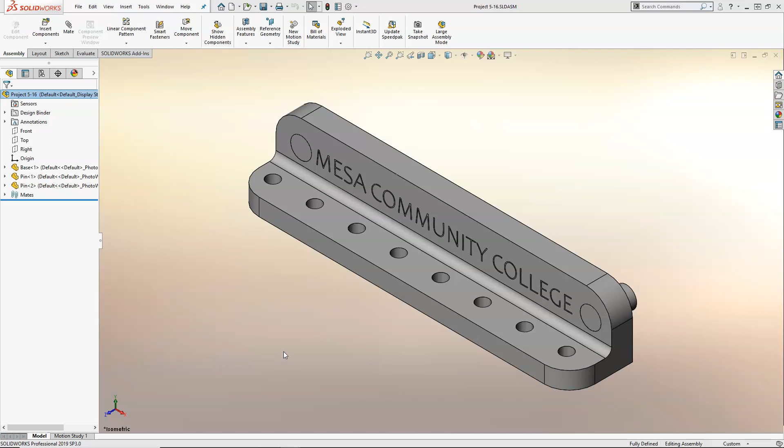Just notice the opening of the videos all look pretty much the same here. So I'm going to hit the space bar.

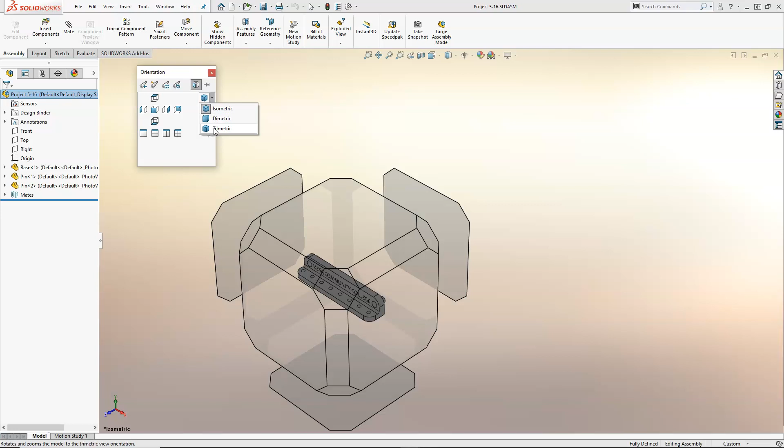Under our orientation we have the standard views again. We don't really have a need to split the screens. We have a normal to, but then in the upper right corner I can go to dimetric or trimetric, which just kind of shifts the position.

I can also hold down the middle mouse button, rotate this a little closer to position, and I need to know the order that we're going to assemble. So we have the crank on the left side, the coupler in the middle, and the follower on that side.

So we need to bring a component in. It's not currently loaded, so we're going to browse to our folder, and we're going to bring the crank in first.

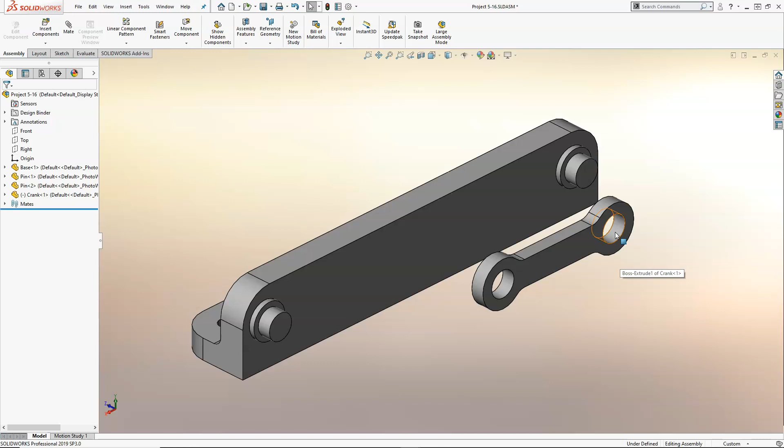And I can just rough position it. It doesn't really matter which side, it's symmetric. As far as orientation, it's pretty close there. So with our 6 degrees of freedom, I do want this to rotate. But there may be a location, something that I would want to set up as a mate, just so it doesn't move unexpectedly. Alright, so I've already selected my cylinder.

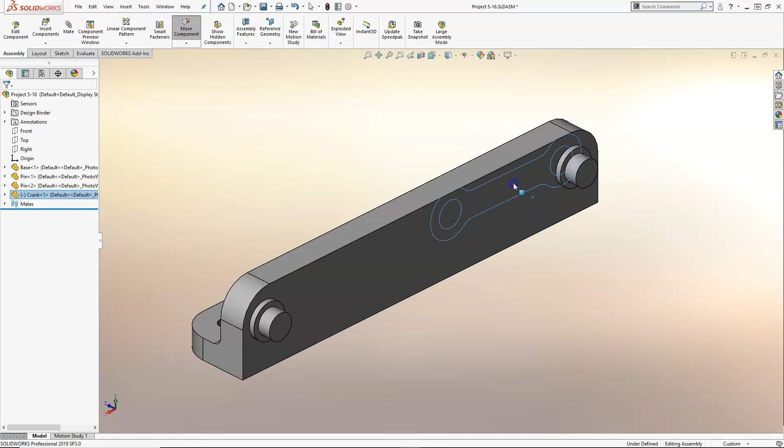I'm holding down the control button and selecting another cylinder, and we'll go right into concentric. This is going to be the fastest way to apply the mates. So that goes into position, but it's still able to move back and forth.

So I'm just left clicking, holding down on the face, and as I move the mouse it's going to move the part. So I've clicked the inside face, holding down the control button again, and we'll make that coincident.

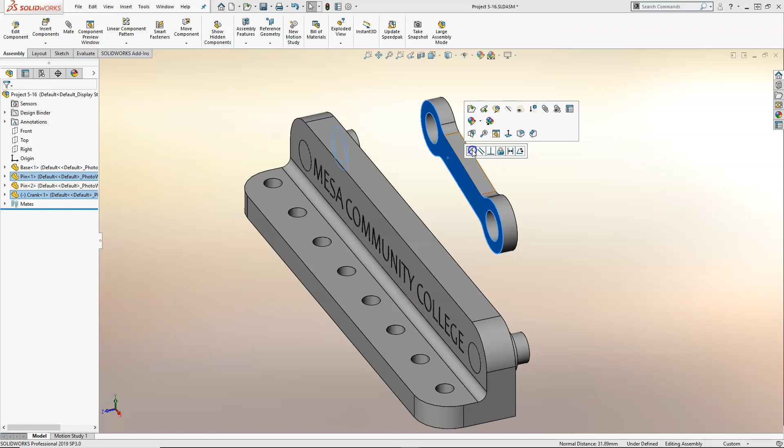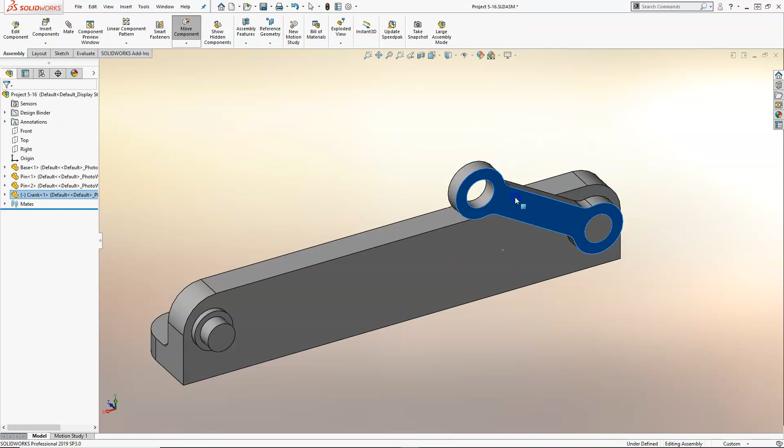So we're doing a lot of coincident, a lot of concentric. Anytime you have planar faces, you're going to be doing coincident. Anytime you have those cylinders, they're going to be concentric. In this case I do want this to be able to rotate. I don't really know what's down here, what the rest of the assembly looks like, if this is going to run into something or if there's issues, but that gives us a good start.

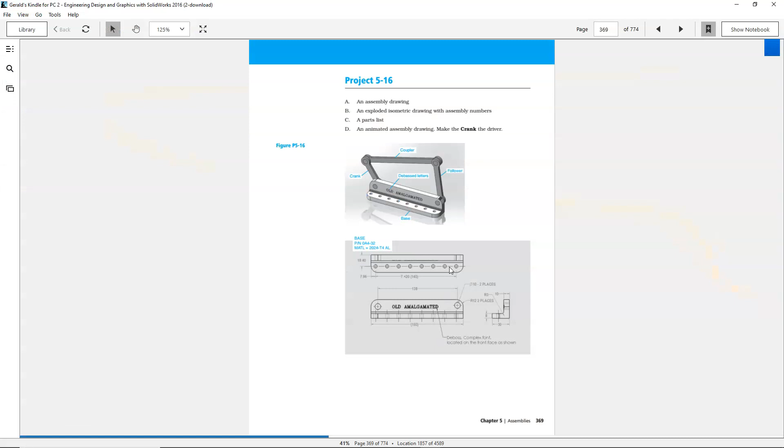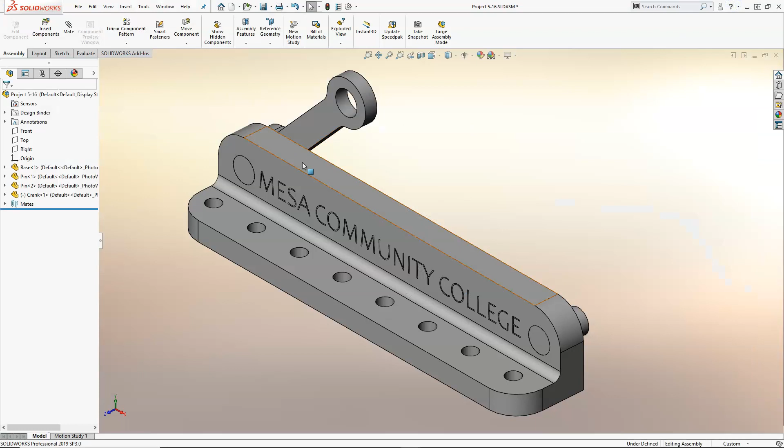So the next item would be the pin, if I'm going in order here, thinking about how this would assemble. It doesn't necessarily have to be the pin, but because of that flange, I'm going to need that as a space or a location. If I were to just take the coupler and put it right up against the crank, then I wouldn't be leaving room for the pin. And of course, if it's on this side, it's going to run into the base.

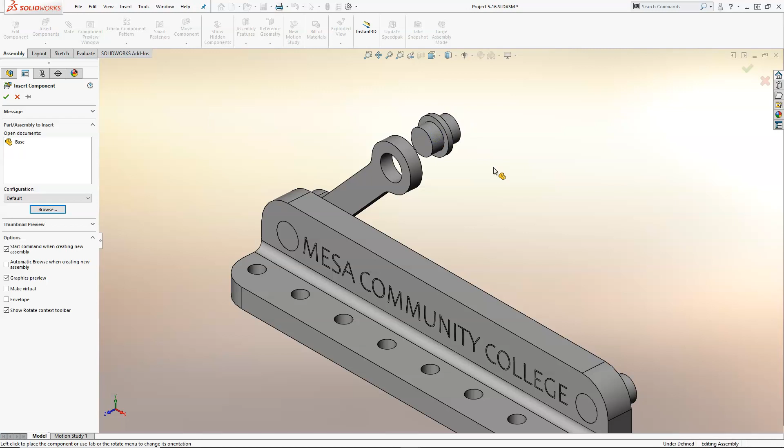So let's go ahead and insert a component, and then browse. We'll pull the pin in, and its orientation, not so much. So if I look down at the reference triad, let's rotate about X because it's symmetrical. Doesn't really matter, and we can go ahead and place it. I'm just going rough position as we rotate. I got it pretty close. Didn't throw it off into space anywhere or do anything strange, so we'll call that good.

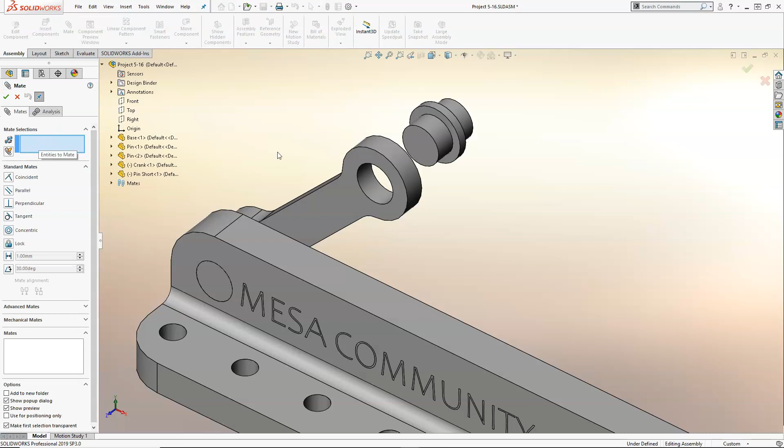So previously we did the select and control select. Let's do the paper clip this time. So we go up to the mate relations, and as long as the blue box is there, I don't have to hold anything down on the keyboard. So I'm going to pick my cylinders, and that's going to allow it to go to concentric. Again, the pop-up is going to be in there.

Rotation, well, it's still going to rotate with the part. We haven't really done a motion analysis or decided what we want to be the bearing surfaces and the press surface, those types of things. So we're going to hold off on that and let it do its thing, observe the motion, and see what we can come up with.

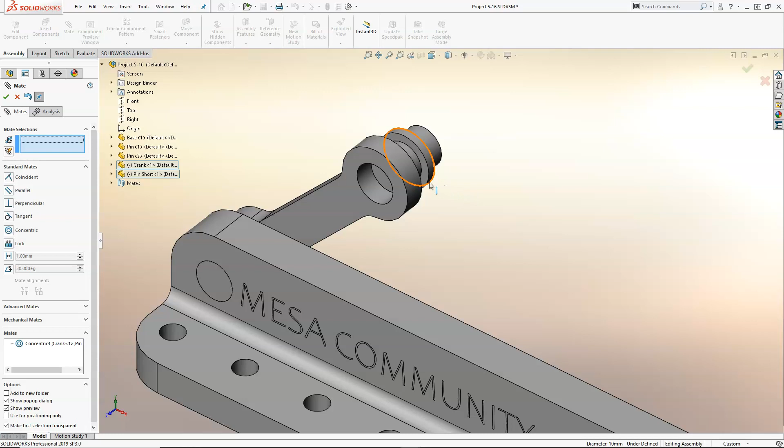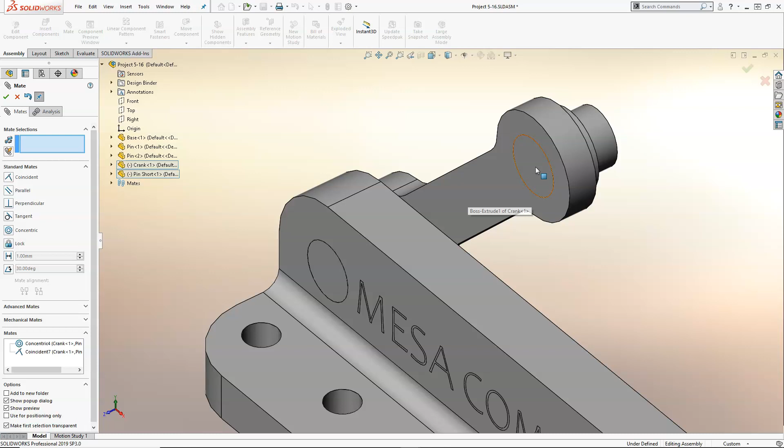Alright, so once I picked a strategy, I'm going to kind of stay with it. And that inside face, rotate around, go to the other inside face, and hit OK. Now, because these are planar and the same dimension, I could have picked that face, but if that dimension changes, if the crank gets a little thicker or thinner, then the flange isn't really going to follow it.

And I may end up with an error since that is the seating surface. When we press that in or put it into the crank, that's the point of contact.

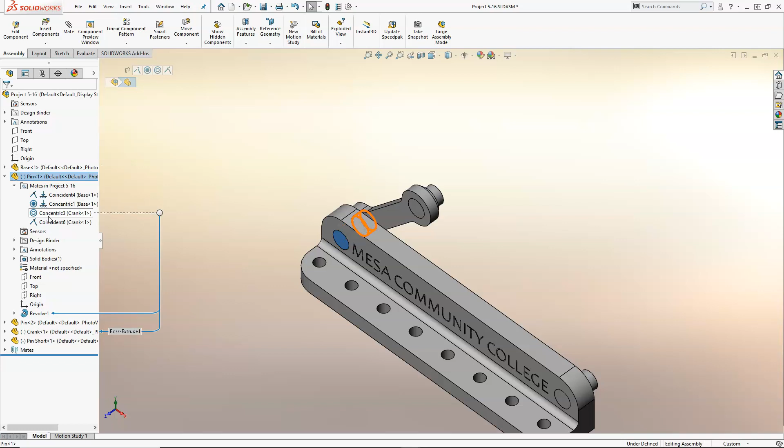Alright, so we're going to let that rotate. So now I thought I located that one. So let's see what's... oh, we have the other concentric. Not exactly sure why it would cause that one to go underdefined, but I'm okay with that. We'll see what happens to the other one.

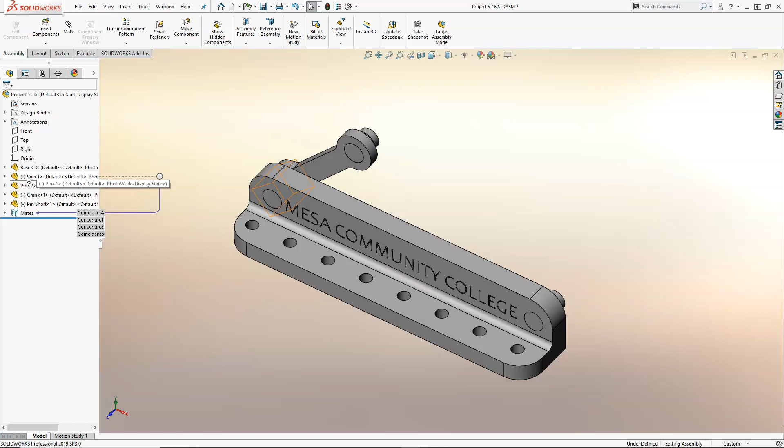Alright, so I'm always doing kind of this running tally as we go through the process, looking over to the left. That one was defined, now it's not. Not sure why. Does it hurt anything? In this case, no. So we'll just go on to the next one.

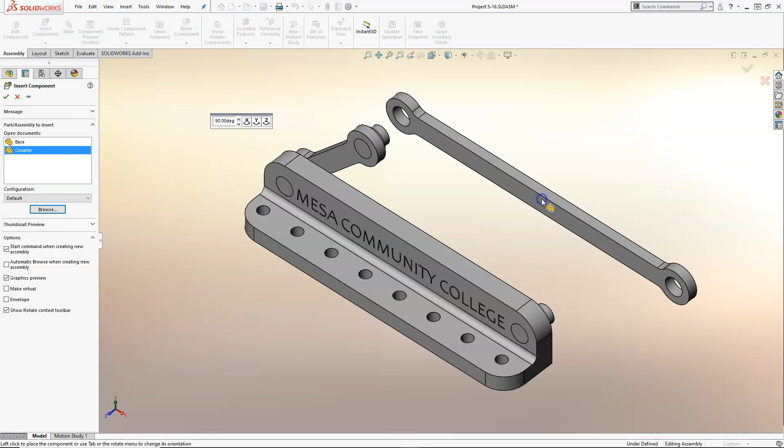Insert component, browse, and now we're looking for the coupler, which is the long one. And we bring it in rough position. Orientation is okay. And now to locate it, we're going to go through the same process. Cylinders. Let's see, we need another way.

So if you're comfortable with the select and control select, stay with it. If you're comfortable with picking the mate relations paperclip, stay with it. And then I'm going to introduce the S key. So S on the keyboard, and that will take me to the paperclip.

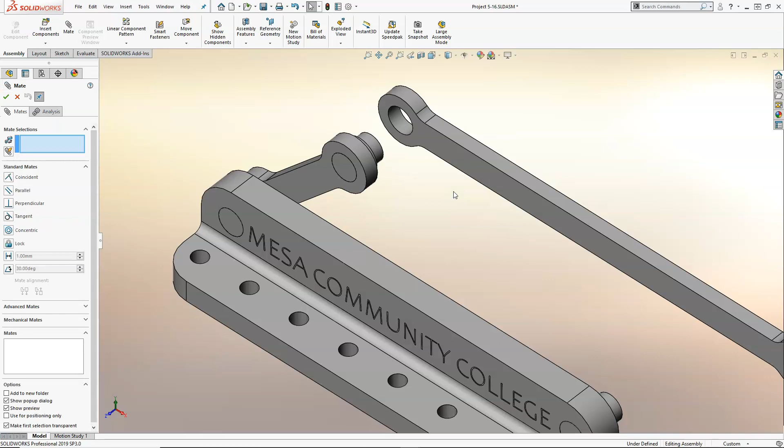And since I'm in the blue box, I don't really need to go over and do anything, I'm just ready to pick. So again, the advantages of the mate properties is that I don't have to hold down the control button on the keyboard.

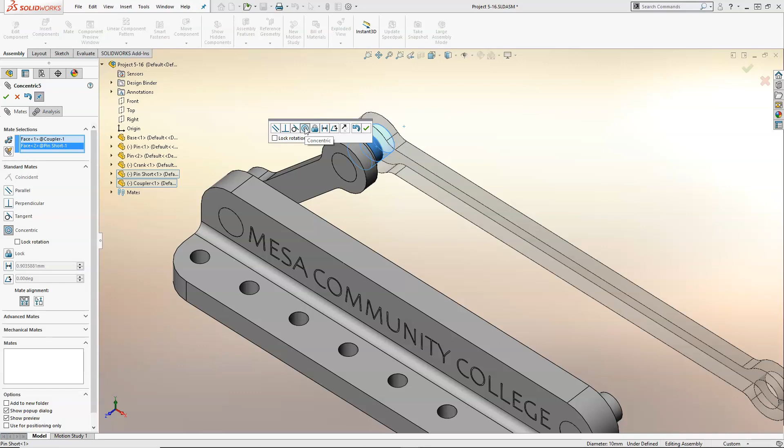All right, so the pop-up, we're at concentric. If I don't recognize the type of mate that it is, hover over top of the button, or look over to the left and it will give you the text. Okay, so we go ahead and hit OK.

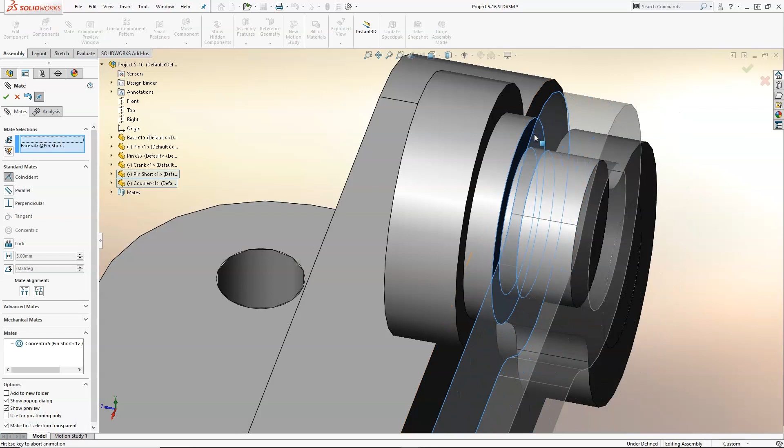Staying with my strategy for the coincident, pick the face, rotate over, and then the middle mouse wheel, wherever you're pointing with the arrow, that's what's going to zoom in. So if you have any difficulties picking a face too far out, do not hesitate to zoom in and make sure that you can locate that geometry.

Alright, so at this point, rotate a little bit more. If I go to move the crank, it's kind of staying in position, but if I wanted to, this can do all kinds of strange things.

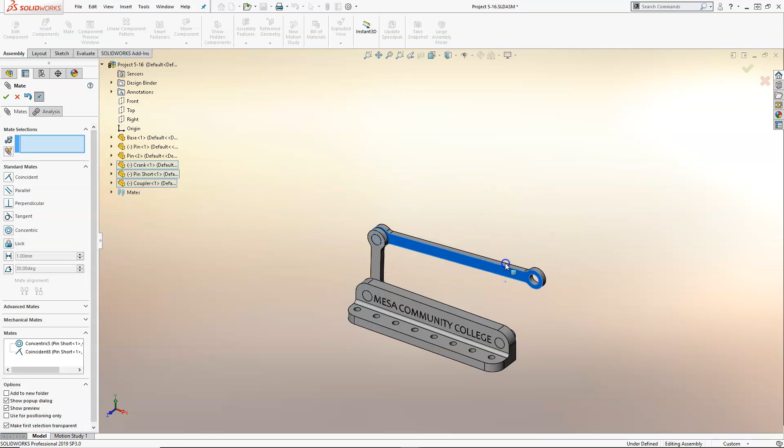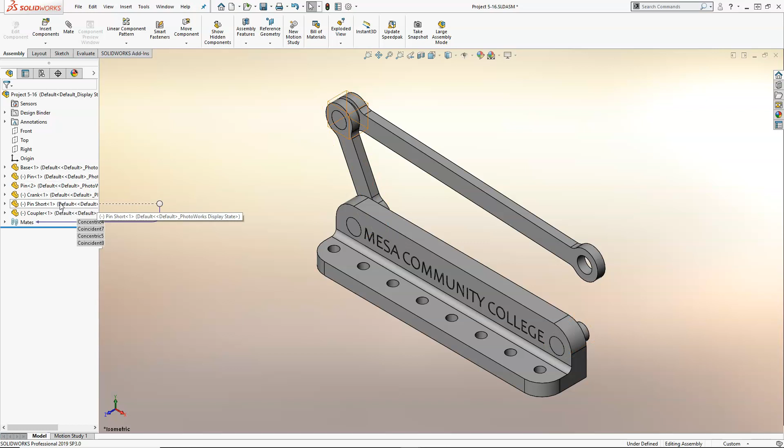Alright, so Control 7 gets me back into an isometric view, and then we're going to insert another instance of the short pin. So hold down the control button. Last time I think I did it from the work area, grabbing onto the part. Here I'm going to grab instance 1, drag it in, get it pretty close, let go of the left mouse button, let go of the control button.

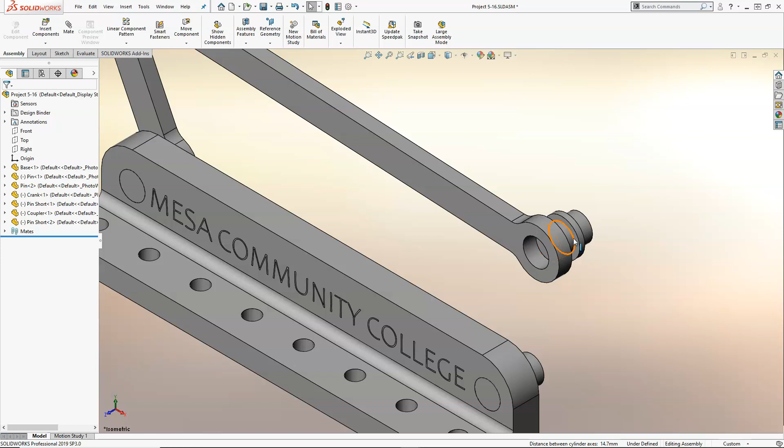Now I'm in position. Alright, so I'm going to go with select, control select, and concentric, and the mating seating face, control select, and coincident. So you're going to find that you're going to get into a rhythm with this, whichever method you prefer, and be able to generate those geometries.

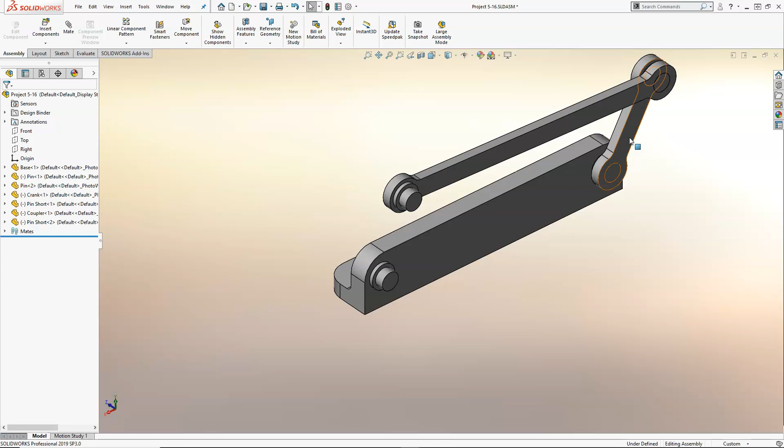Alright, so let's say for a second that I forgot that I have a follower arm, and I grab a crank arm and I bring it back in. Oh, don't know what I clicked there, but I got something. And I go ahead and we're going to apply those mates. Concentric. Yeah, that got kind of lost, so if I left click and hold down, it did apply.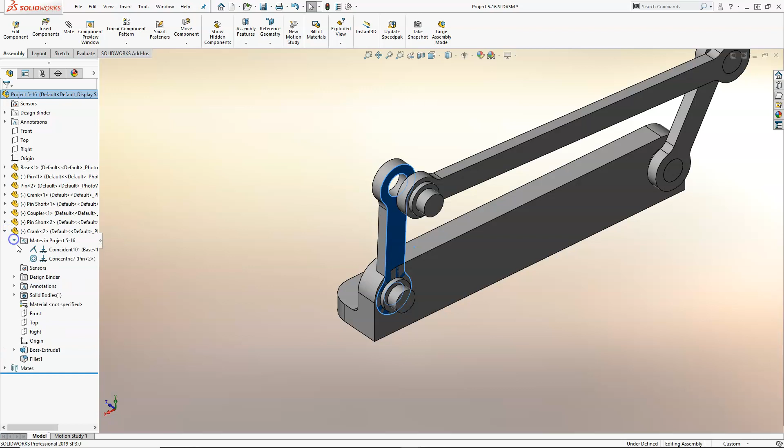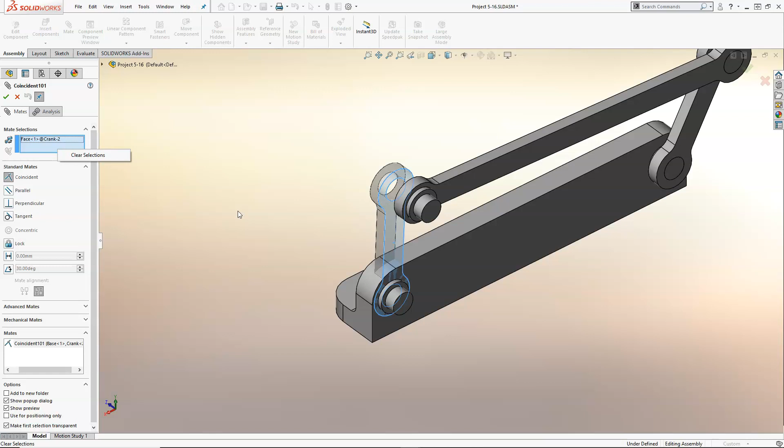Alright, so I got a coincident to the edge. Button happy, so occasionally we're going to get that inferred geometry. So I want to delete the edge. It's on the base that doesn't help me, so I can just highlight it and hit delete on the keyboard. If you right click and clear selections, be careful with anything that says delete all or clear selections. Going to pick on the face.

Cause mate errors. Do you want to avoid these? We'll let it go ahead and change. So it turned it around. I probably could have just picked the other side and it would have been fine.

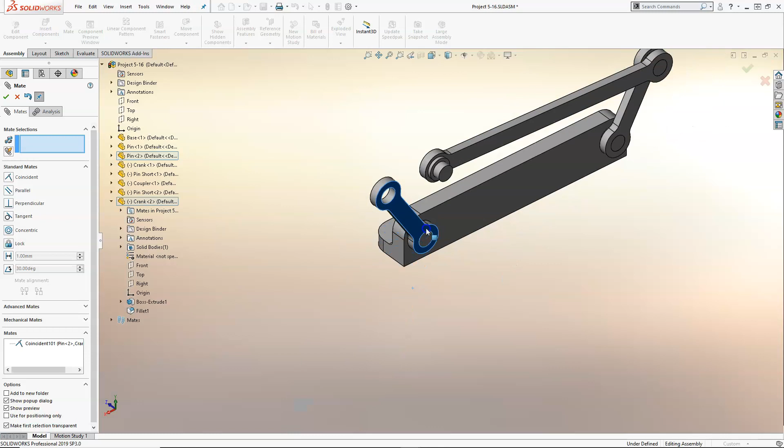Alright, so let's rotate that up. That gets it into position. I have the appropriate gap. We're not quite lined up somewhere there. Oh, I started building out, so wasn't actually paying attention to what I was doing.

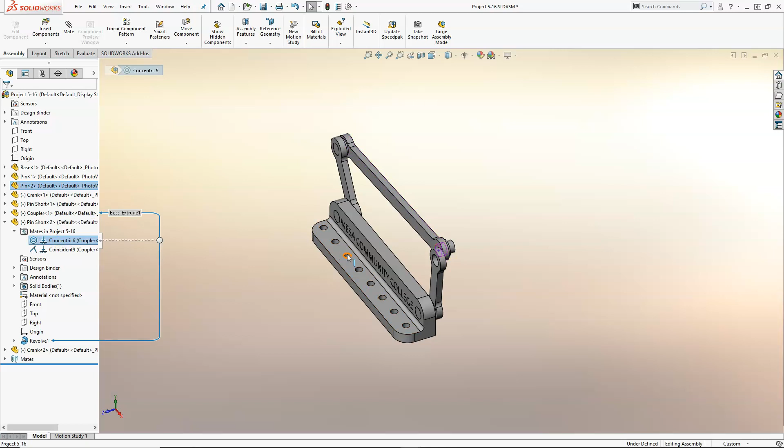So that's going to happen. If we go back into the pin, concentric is good. Sharing those centers is fine. My coincident is the one that has the problem. So just like here where I went back in and edited,

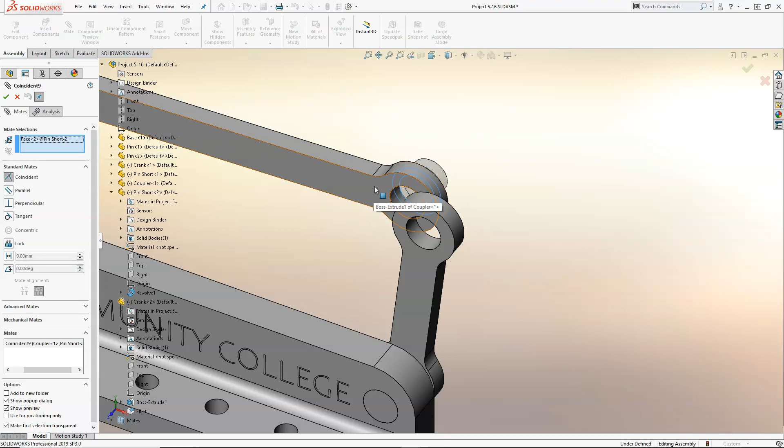whatever that was, I'm going to deselect the face on the coupler. Alright, so looking at that definition, I think the face for the pin's good, so the other one on the coupler is the one that I want to remove, and that was just highlighting it and hitting delete on the keyboard. Then I'm going to select the face, and go ahead and figure it out.

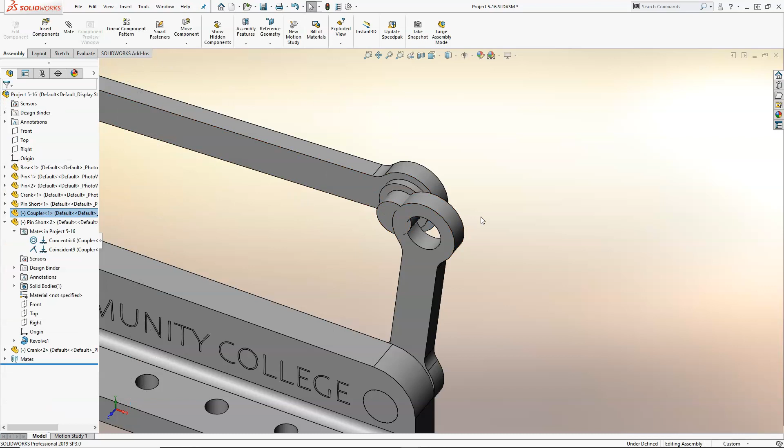And the following mates were reversed. And okay, if it did not do that, and did not do it correctly, or did not give the desired result, then I would need to break or apply those mates manually. Alright, and then the last one is to control select and go concentric.

Alright, so at this point I look down through my list, everything moves. Interesting. So something happened in the coupler in that mate. Concentric, coincident, concentric, coincident.

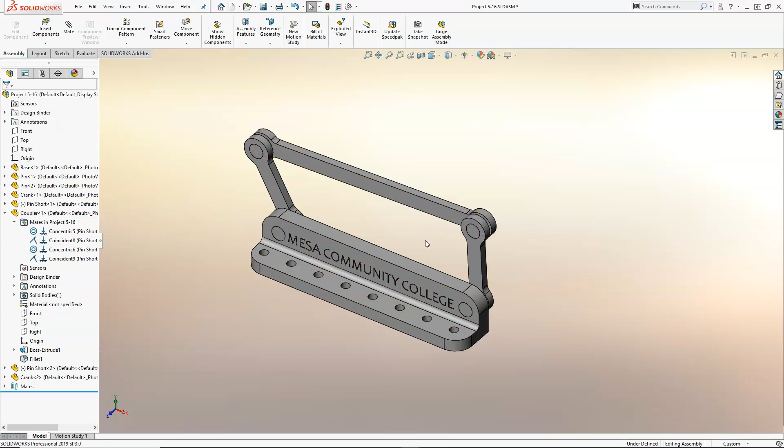Well, they're the same length, so maybe one of those isn't happy. Or the other crank, we have coincident, concentric, concentric.

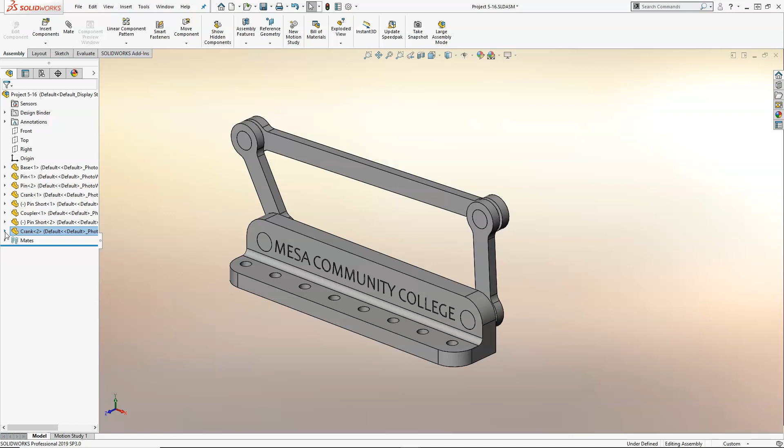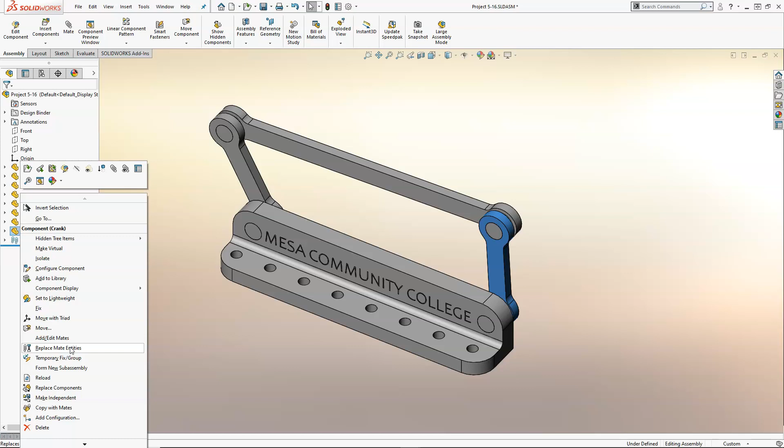Alright, so at this point, let's try to replace that crank. So I realized that I made a mistake. I can always just right-click and delete it, and when I hit the delete button, it's going to remove it. But I also have the ability to, if we do the down arrow, replace components. So replace mate entities, replace components.

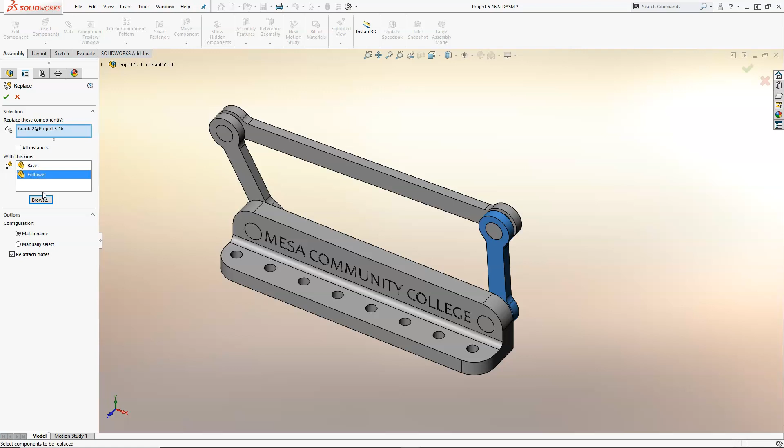I want to replace the component. So the crank instance 2, and we're going to browse to the follower. Okay. And no, I don't need the base. Not sure why the base is still in there. Okay, I'm going to make sure it's highlighted just in case.

Alright, so it puts the follower in, and because it's similar geometry, because I actually did the save as and it should be the same geometry, it's going to find the coincident, it's going to find the concentric, it's going to find the concentric, and if any of those are incorrect or missing, we can always delete them, not apply them, go through and adjust accordingly.

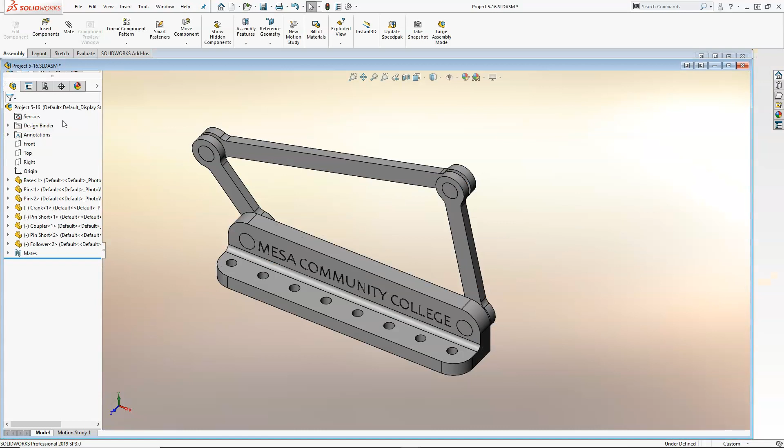Alright, so now we have the follower. Let's see if that will rotate. Alright, so if that one's moving, well, we already said that's the follower, so there we go. So it can do some weird things.

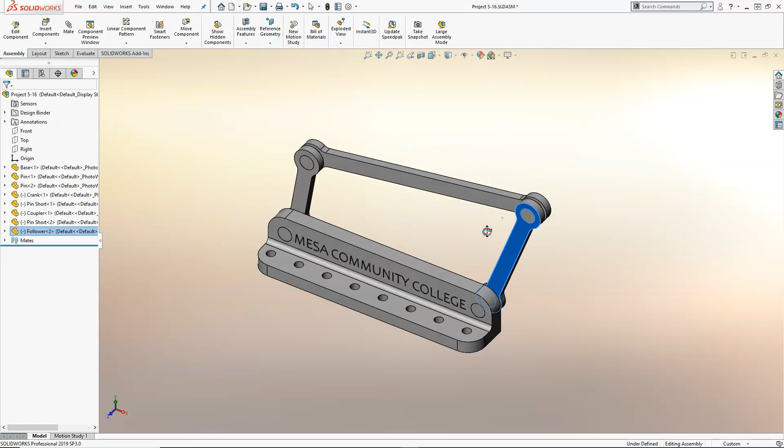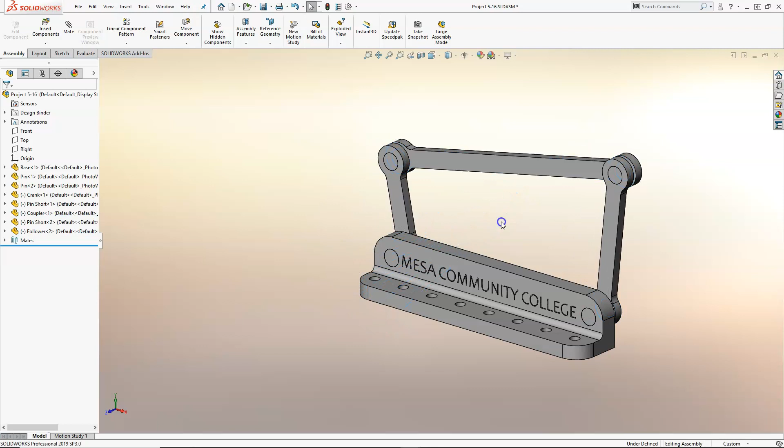Let's go to the backside view, and as we're rotating this around, let's see if that will—so it can't stretch past that point, but when we come over here, it's making kind of that weird little jump. Alright, so we're going to get this where it looks halfway decent and call it a finished assembly.